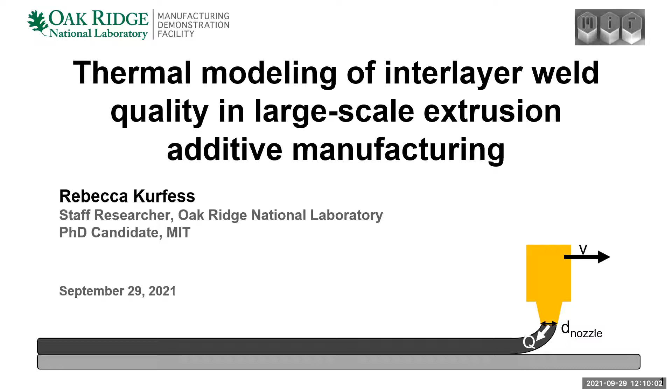Perfect. So I actually have two different bodies of research that I can present here, and I'm going to start actually in the middle. So this is actually the wrong slide. I apologize.

So I'm going to start with what I find to be the more exciting content for discussion, because it's my current PhD research. I think this will provide a much more exciting discussion. And then if any of you want to stay for a more completed body of research that I did on thermal modeling of the polymer extrusion process for prediction of interlayer weld quality in large-scale polymer extrusion, which is kind of a mouthful, I'm also happy to discuss that as well. But for now, I'll start with this body of work.

See? Hello? Okay, as Rachel said, my name is Rebecca Kurfess. I am in a unique and very exciting position of being both a PhD candidate at MIT and also a staff researcher at Oak Ridge National Laboratory, which is in Oak Ridge, Tennessee.

It's a really exciting position for me because I get to basically use a national laboratory as my grad lab, which has given me a lot of exciting opportunities to do things like use a lot of different metrology and characterization equipment and larger, more commercial systems, which has been very exciting for me. And I'm going to present to you today the work that I've done so far on directed energy deposition on polymer substrates.

So a little bit of an introduction for those of you who don't know as much about additive manufacturing. Additive manufacturing as a general process is this idea of selectively depositing material to build up a component, versus the more traditional subtractive manufacturing where you start with a block of material and you take away the parts of the material that you don't want to create your shape.

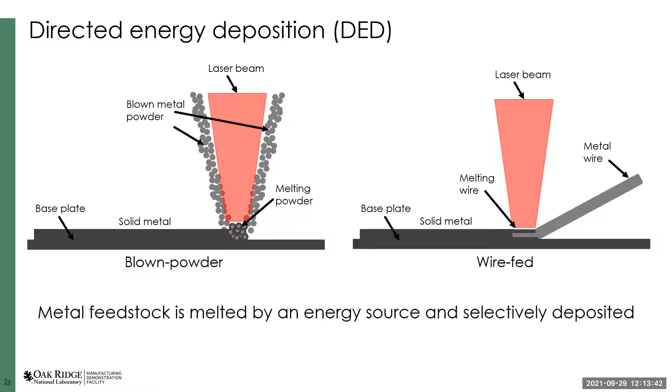But of course, I've spent just a couple of minutes talking about how DED is really great. Like any process, it has its limitations. Because DED uses a much larger bead, it's a pretty large scale metal process. You can make parts that are on the order of a meter large.

It's very, very difficult to create overhangs and bridges, more so than with other processes, because the bead that you're using is much larger and much heavier. So you're really restrained in the steepness of your overhangs, the length of your bridges, and therefore in the overall possible complexity of your geometries.

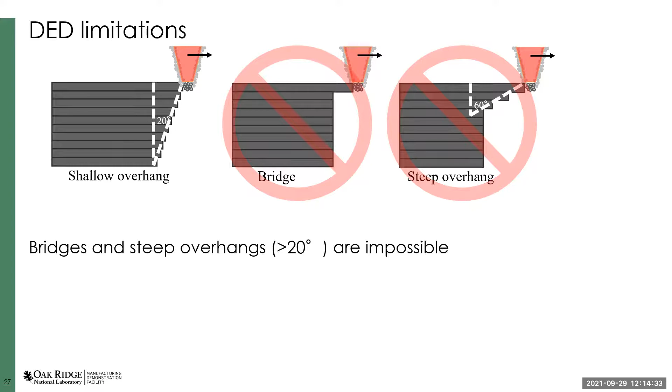So the general rule of thumb is that you really can't print anything greater than 20 degrees as an overhang. There have been some strategies to try and mitigate this and to problem solve this.

There has been some minimal work in support structures in DED, similar to support structures that you might see in plastic 3D printing, desktop 3D printing, but they're much more difficult to remove and much more difficult to design in the first place. Again, because your bead is so large, it's much trickier to machine it off at the end, and trickier to get the lattice type support structure to support the weight of your bead.

So they're really not frequently used. I've been at Oak Ridge over a year now, and we have, say, 3 DED systems, and I've never seen a part printed with a support structure.

Another option is to use a 5-axis system, basically enabling you to rotate and reorient your parts so that, looking at your part, it is a steep overhang, but when it's printing in the machine, the part isn't seeing it as a steep overhang because of reorientation.

But 5-axis machines, I don't know if any of you guys have looked into the cost of machine tools, can usually add 1 or 2 zeros to the end of your price for those. And you still can't print things like bridges, so you can't have a gap that you print over with your metal. And of course, the final option is always to redesign your part entirely or to use another process.

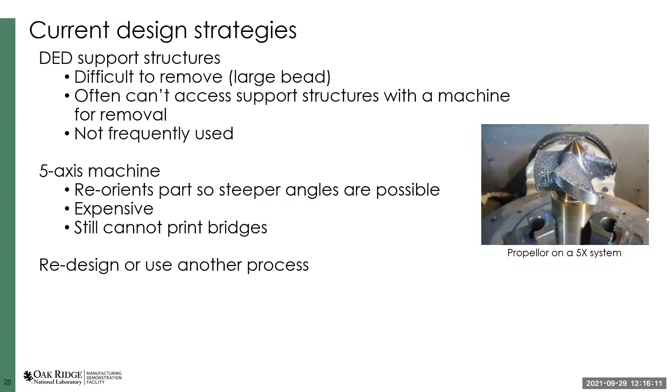So the proposal of my research is that we can use a different material, such as a polymer or a polymer composite, to support our metal bead during the DED process, enabling geometries like bridges and steep overhangs.

If this is possible, it would really expand the DED design space and enable even more functionality of components for industries like aerospace and the mold and die industry and the oil and gas industry. So the ability to expand this DED design space is really the goal of this research.

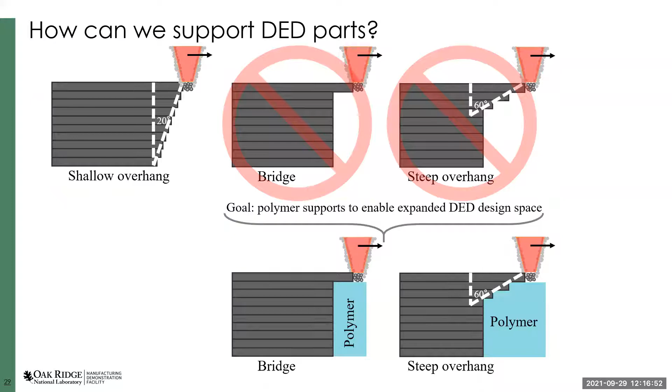But of course, first we have to see if it's feasible at all. So a little bit about the system that I'm using for this.

The system actually inspired my research because it is a hybrid system, which as a general rule includes 2 or more kinds of manufacturing processes. Generally up to this point, it's been metal additive manufacturing, so some kind of DED process in combination with machining, to provide both the flexibility of additive manufacturing with the precision and good surface finishes of machining.

The system that I'm working with, which is a Haas CNC machine tool that was modified by a company called Hybrid Manufacturing Technologies, or HMT, to be a hybrid system, actually includes both the blown powder DED that I mentioned earlier and polymer extrusion. So we have the capacity to print something out of polymer and then come back and print with metal on top of it.

That's never really been done before. It doesn't sound like a good idea when you first introduce it because the melting and degradation temperatures of polymers tend to be much lower than the melting temperatures of most metals.

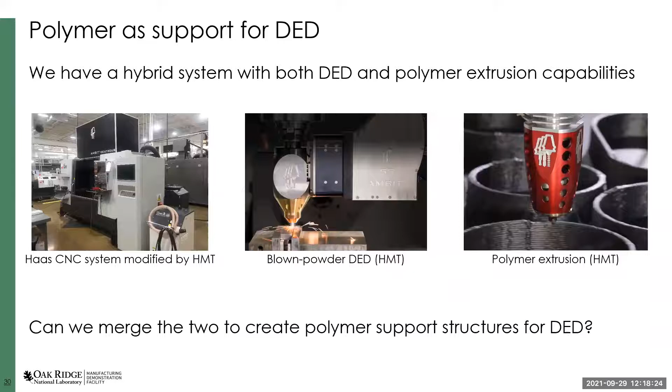We wanted to investigate the feasibility of integrating these two processes, polymer extrusion along with the blown powder DED. Before we did that, I did a bit of a dive into polymer material science.

One thing that was very encouraging for this body of research is the idea of ablative polymers. They actually make a category of polymers designed to survive in extreme environments, generally used on things like spacecraft reentry.

It's unreasonable to expect any polymer exposed to very high temperatures, like being blasted with a laser or having molten metal dumped on it, to show no degradation. But the goal with ablative polymers is that a thin layer degrades, and that degradation results in some kind of shield that protects the bulk of the polymer from further degradation.

So basically you have a char, usually made mostly of carbon in traditional ablative polymers, which can resist much higher temperatures than the original polymer. That carbon char will protect the bulk polymer from the rest of the heat.

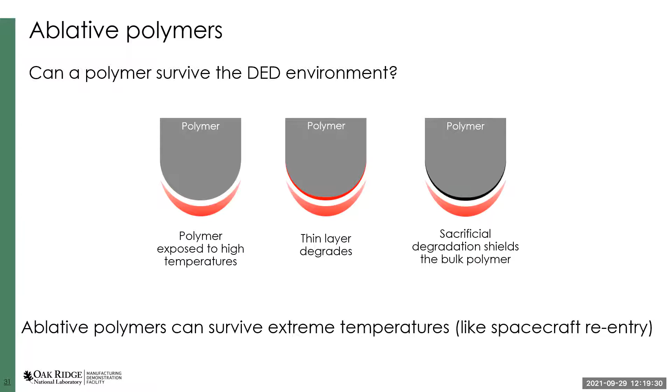Unfortunately, the traditional ablative polymers tend to not be very printable. They tend to be thermosets, polymers created via a chemical reaction. Think of something like super glue - you squeeze it out of the tube, it reacts, it solidifies, and you cannot process it again.

Versus thermoplastics, which are the materials generally used for polymer 3D printing - these can be heated to soften them, extruded, printed, formed, and then reheated again. You can cycle them through heat. The Venn diagram of those two categories doesn't really overlap.

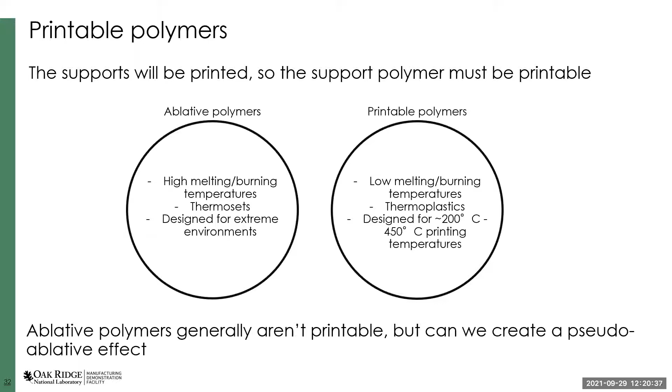So what we needed to do was see if any of the polymers readily available for the extrusion printing on our system could act in this ablative manner. We were looking to create a pseudo-ablative effect with a non-traditional ablative polymer, a non-ablative polymer.

So we investigated the idea of filled polymers. Several types of polymers printed on large-scale polymer extrusion systems, like ABS, are filled with things like glass fibers and carbon fibers. These fibers were introduced in the first place because they mitigate a lot of the warping issues seen with larger scale printing.

But we hypothesized that by using these polymers as our support structures in the DED process, these fibers would actually protect the bulk polymer from the thermal effects of the DED process.

The idea is that you have a polymer embedded with a bunch of chopped fibers, whether carbon fibers or glass fibers. When you expose your polymer to both the laser and the molten metal, you do degrade a thin layer of polymer, say ABS or nylon.

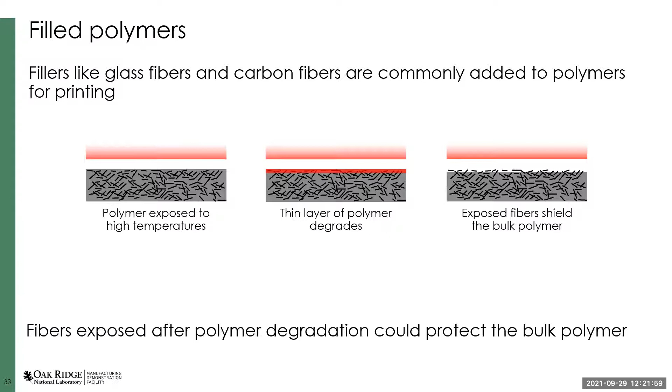But by the degradation of that polymer, you expose a layer of previously embedded fibers that can resist much higher temperatures than the polymer on its own. Once you have these exposed fibers, they can shield the bulk of the polymer from the thermal effects of the process. So that was our hypothesis.

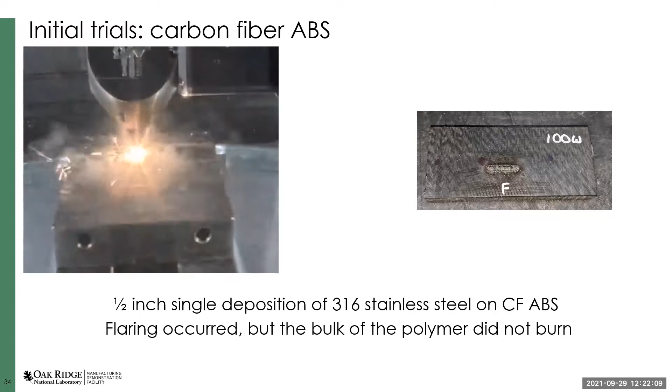And then we got in and ran some trials. This is actually the first one that I ran, which is a stainless steel pass at 100 watts on the system with carbon fiber ABS as a substrate.

I'll just play that again. What we get is a lot of flaring and sparking, but we don't get any - I've been told to call them thermal excursions by the lab for safety purposes. So we don't see anything that sparks a lot of safety concern, although we do see more flaring than traditional metal on metal deposition.

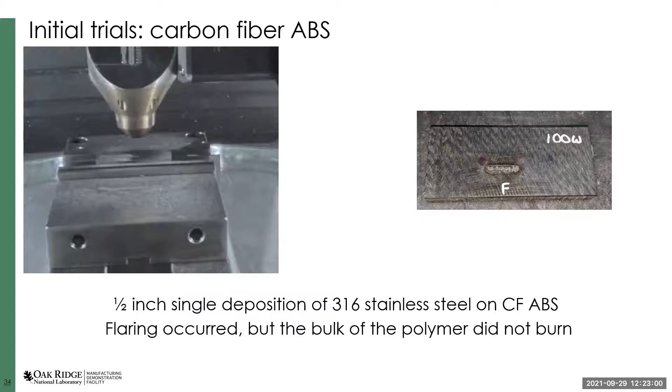You can see here in this image that the substrate actually did survive with minimal geometric integrity loss, which is exciting. The bulk of it didn't burn and didn't melt.

So our next step was to set up some high-speed imaging to see if we can figure out what's happening in the process and confirm any of our hypotheses about what's going on.

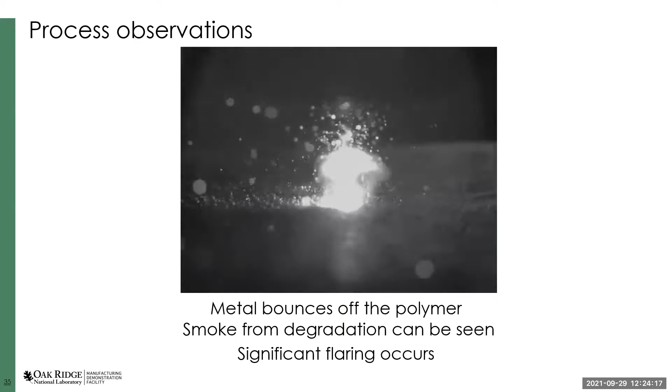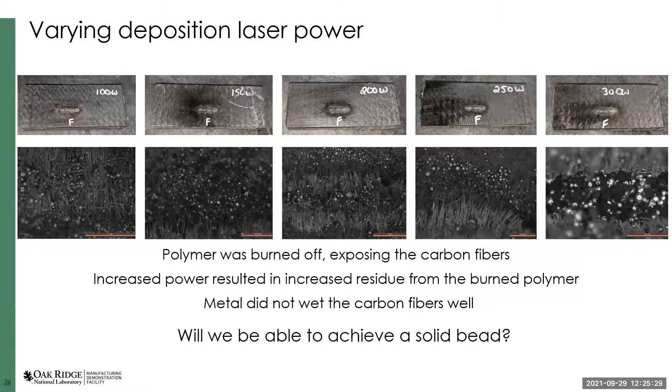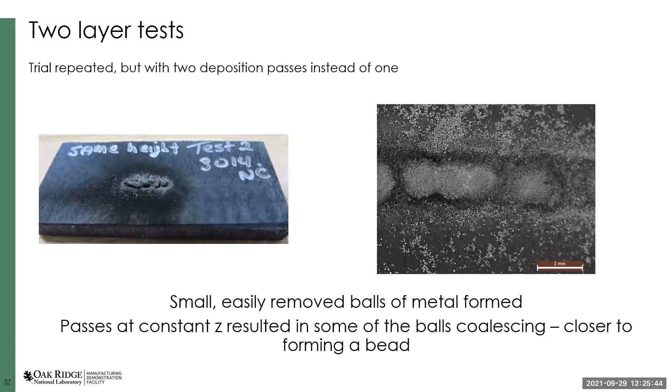So the next step was to determine if we could achieve a solid bead. We just started doing multiple passes. When we tried 2 passes, we did get more coalescence of the metal into metal balls and almost a resemblance of a bead, but definitely not a full bead. And then once we hit 3 layers, we actually did get a fully deposited bead.

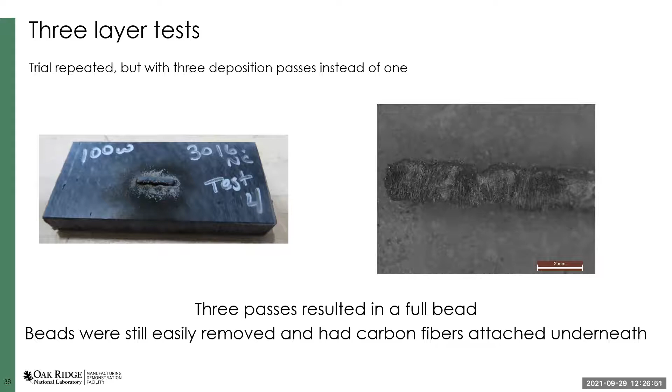And then another test I did with the carbon fiber ABS was just to see what happens when you try and stack multiple layers. Up to this point, I've been looking at the short-term effects of the DED process on the polymer, basically determining whether or not the polymer will survive being exposed to a laser at 100 watts and being exposed to molten metal. So what will the polymer do on the order of microseconds to milliseconds in response to this process?

But I also wanted to see what happens to the polymer longer term, because what you have if you're building up layers is the polymer is no longer being exposed to the laser directly, because the laser is now on top of this deposited metal. But you do have a component that's a couple hundred degrees Celsius resting on top of your polymer, which has a melting point of a couple hundred degrees Celsius.

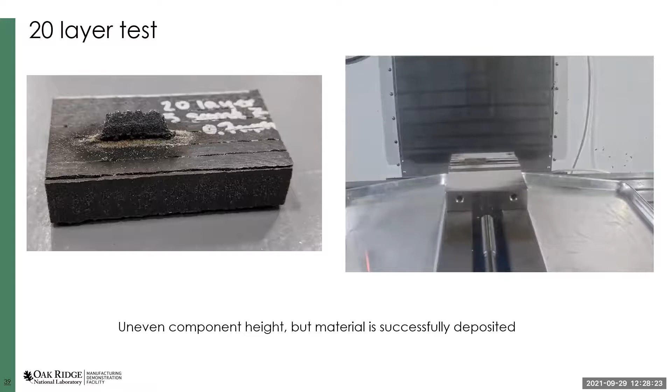So here I have a video of the process. You can see that initially there's still that pretty intense flaring, but that decreases over time as you stop hitting the polymer directly with the laser. You can see that the metal component remains hot, pretty red hot in this image, but you can see that you are getting a buildup of material over time. And as you can see from this final image of the single bead wall I built up, you don't see much degradation of the polymer with respect to melting—this is still a pretty solid block of polymer at the end of this experiment.

So this was really promising, because we now know that we can build up enough layers of metal that at this point, even if the polymer were to start melting or degrading further, we would still be able to build up enough metal to support itself before the polymer is so negatively affected by the DED process that it's no longer useful as a support structure.

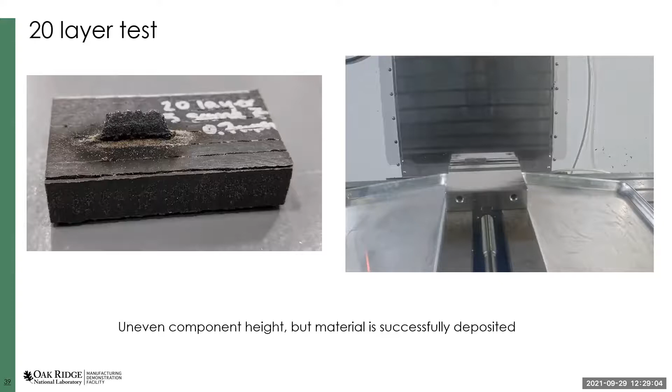So my next step was to test a variety of polymers. I'd worked with carbon fiber ABS, but Oak Ridge has a bunch of different polymers available for testing. So I tested a couple of different filled polymers. I wanted to test glass fiber filled, along with some unfilled polymers, just for comparison.

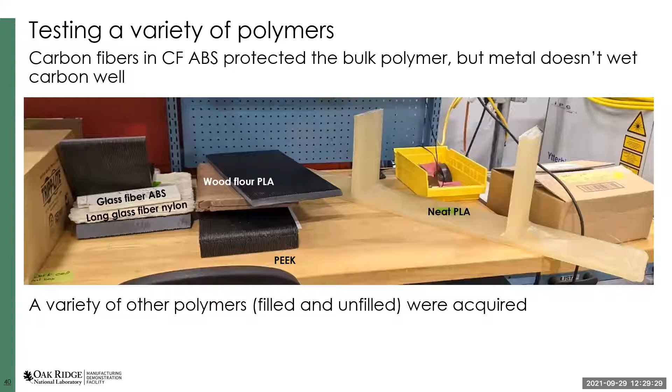So here I'll show the glass fiber polymers. I did an ABS and a nylon, and both of them had more deposition of metal than the carbon fiber ABS, because you're working with glass fibers instead of carbon fibers. Both of them still had that flaring from the degradation of the material.

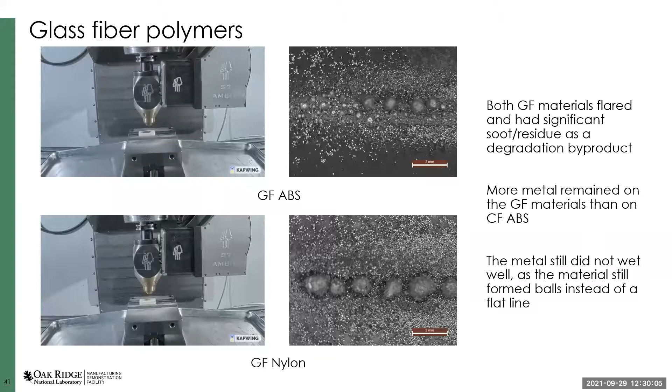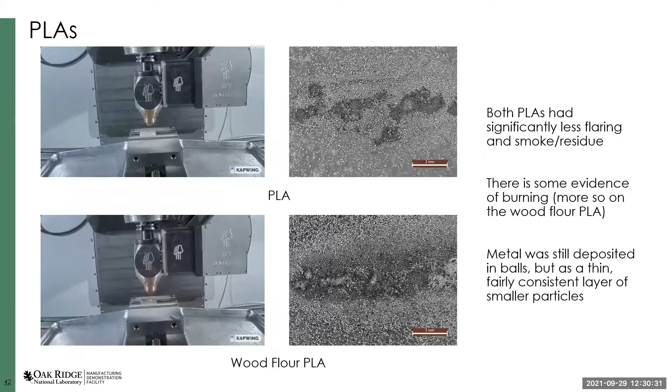And then I also tested - I tested one unfilled PLA and one PLA that was filled with wood flour. I was a little nervous about that one, potentially having a thermal excursion, but it surprisingly didn't. We actually got less flaring with these two tests than with the ABS, which indicated that we're actually seeing more melting of the material than degradation of the material.

And we also got more of an embedding of the feedstock powder than melting and resolidification as a bead, which was very interesting. So it doesn't really provide that same ablative effect of exposing something that could protect the bulk polymer. So this was less promising as a feedstock material.

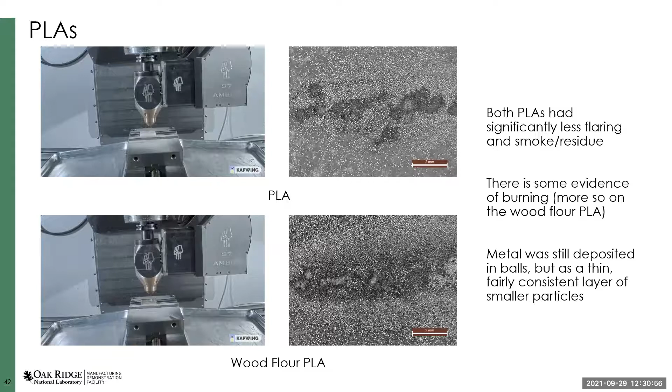And then I also tried it with a high temperature material called PEEK, which I expected to perform better, but was actually pretty surprised that it had a lot of flaring, which is generally a little bit less safe. And it also, the material tended to expand.

So basically the exposure to the laser and to the molten material resulted in such a transformation of the polymer that it actually expanded and shifted the metal deposition. So this was actually the least promising of the polymers as a support structure, which was definitely a very interesting result.

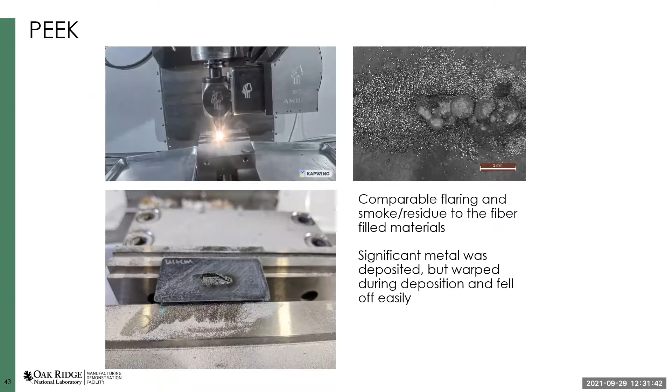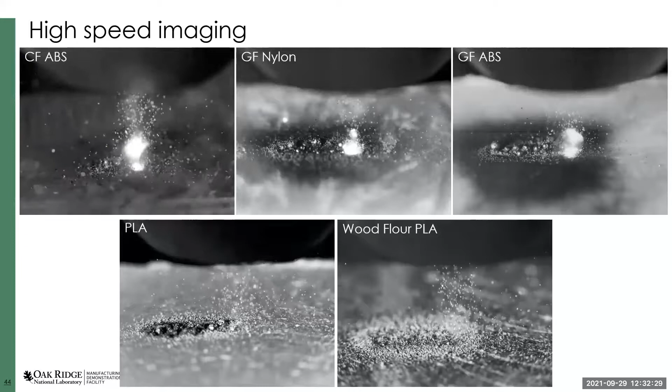Versus the two polymers on the bottom, which are not fiber filled, which have more of a melting of the polymer, embedding of that feedstock powder in the molten polymer, and then resolidification of the polymer.

A lot of videos. So the next steps for this research space are to, one, quantify the effects of the laser on these various polymers. So I'm planning on cross-sectioning all of those single bead samples and measuring the laser affected zone in those areas. And also to quantify a new DED design space - so printing a series of overhangs and bridges and determining what geometries are now enabled by these supports that were not previously accessible by our systems.

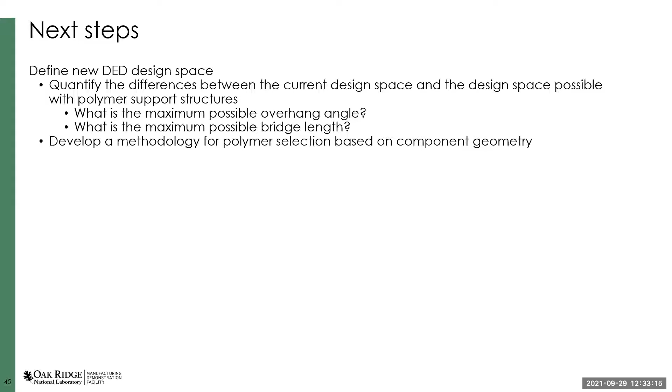So that is sort of a semi-brief introduction to the research that I'm currently working on, and I'm happy to take any questions now.